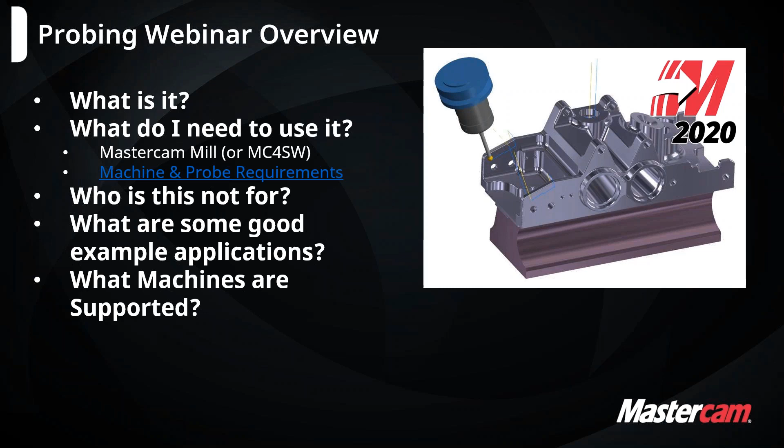because there's the software side of the actual Productivity Plus add-on in Mastercam, and then there's implementation on the post as well as on-site to get everything working flawlessly for you. So what are some of the benefits?

And I've touched on this already a bit, but wanting to use the probe for more than just work offsets, or maybe the routines to do in-process inspection on the machine might be a little cumbersome, or you just want to make sure that all the probe routines are set up before that program hits the shop floor, so you're not reliant on someone else to make sure a certain probing routine happens throughout the process.

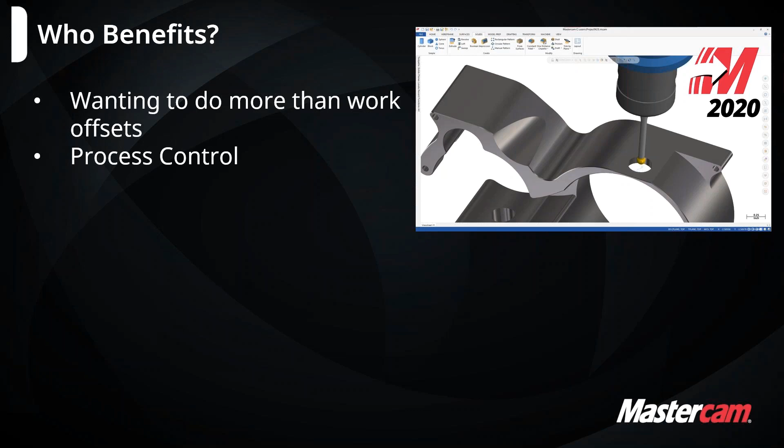So that goes into this process control point, in that all the probing routines are self-contained in the NC file. So when you see a posted program from a Productivity Plus added program in Mastercam, you're going to see all that if and then logic within the NC code. So it's self-contained and travels along from job to job.

And that also gets into predictive process and the smart machining, I think, tie into each other in that you're getting an in-process state of the machine components throughout the job. So you're essentially adding intelligence to the program to get the most out of it, and cut down on cycle times and all the benefits that go along with that.

And the reliability point too just ties into kind of bringing all of those points together, in that you're, as I've already mentioned, reducing the amount of human involvement and potential issues in communication throughout the shop floor.

And then another benefit is the efficiency aspect of this that I've touched on here, which, if your work offsets and tooling offsets and everything is all dialed in, you're going to maybe cut down on the amount of air cutting you're doing, especially if you're working with a casting or a forging.

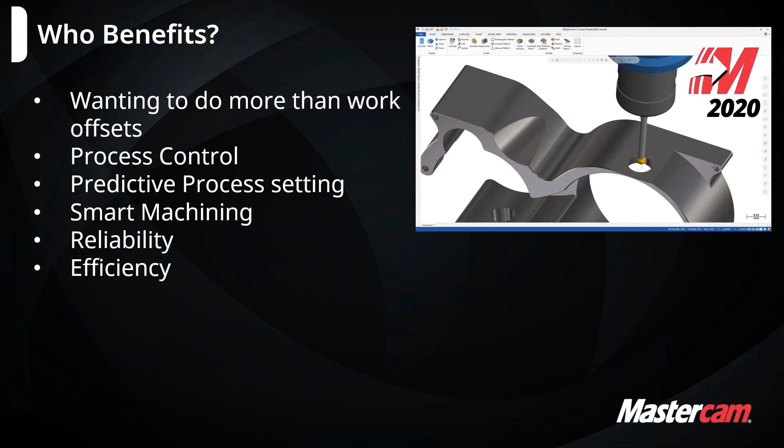If you have that coordinate specifically dialed in for that specific casting, those first couple passes, even if it's a big part, that can be a lot of time if it's just wasting time cutting air because your height offset isn't exactly correct. What are some of the challenges to the Productivity Plus software?

Let's say you don't have a Renishaw probe, like a couple people answered. There are other options for you, and we've done a lot with customizing post processors for specific customers. There's also other workflows that you can do to still add some of this probe technology into the part, even if you don't have the Productivity Plus. But as you guys will see in a minute here, when Joe goes through it, you'll see some of the power that the actual software has.

And then the other challenge, I did these in reverse order, but just getting everything set up, depending on the specific machine tool and what version of the Renishaw software you have, there's a lot of variables to dial in and make sure that everything functions flawlessly for you.

So that's why when we quote this out for a specific customer, you'll typically see 3 line items on the quote. One's going to be the actual software add-on to your current Mastercam package. 2 is going to be the post-processor modifications. There's a handful of different files that need to get set up so that it talks with the Renishaw software that's on the controller. And then the third part is a training implementation portion of it.

So we always come on site, and it's essentially a requirement of getting this package, because we're making sure that post modifications that we've made interface with the controller properly, that the open variables for the probe routines are set up correctly, and then lastly, just training on how to actually use the interface.

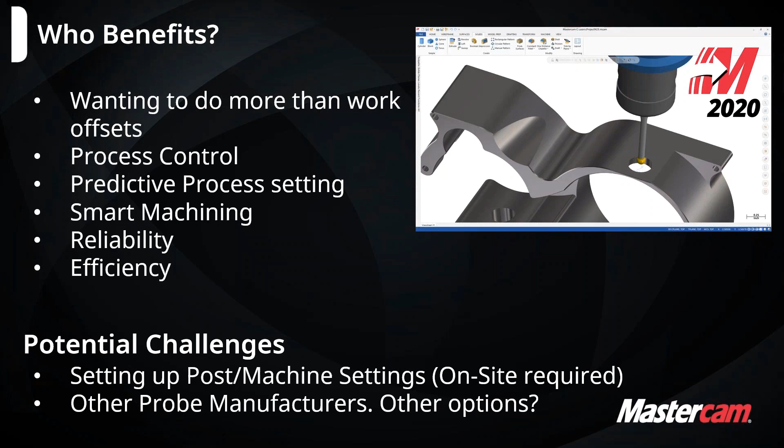So, like anything we sell here at ShopWare, we want to make sure you're effective with the tools that we're providing. So with that being said, we're going to take a second here to pass it over to Joe. I was wanting to bring up a couple updates to Mastercam 2020 and Productivity Plus.

So with 2020 being released here, an update to Productivity Plus is that we can actually post out probing cycles with our default MPFAN post. This should be used with caution, obviously, for any toolpath that you might be running. It might not run on your machine per se, but it is good to see the code output in the meantime before ShopWare can get out there and prove out your machine. So that's what we're going to be using today for quite a few of our examples.

Another update that we have for 2020 as well is that probing used to require wireframe, but now in 2020 it supports probing off of solid edges and other model features. So those are the two main ones here.

Another thing I wanted to mention as we're going through the examples is the help menu that's in the bottom of the toolpath manager for each of the probing toolpaths. It's extremely helpful and very informative for everything that the dialog boxes might display. So it's very good for practicing and familiarizing yourself with some of the jargon and language inside of those paths.

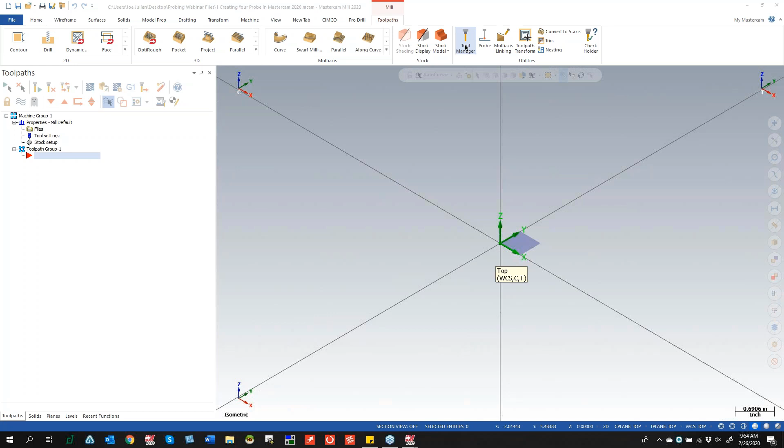So whenever we pull up a probing path in Mastercam, it's going to ask us to define a probe. So under our utilities subsection in our toolpaths tab in Mastercam, once we hit our probe, it's going to display our prompt. And we can choose to edit the sample probe that comes with Productivity Plus, or we can completely create a new one.

If we have a specific probe database that we want to update into our new software, if you're a new user coming from another user that might have a little more experience, we can import that as well. So I'm going to demonstrate creating a brand new sample probe. If we go in here, we get this edit probe dialog. We can give our probe a name, so we can say, Prod plus example.

Now, depending on how your machine runs the offsets, we're going to give our tool the tool change ID, and depending on what your machine takes, we'll either match that or give it a different offset. In our probe module, we have a drop-down list with a few of the Renishaw supported probes inside of Productivity Plus. As we select one of these, we can see that the window to the left changed with our selection. So I'm going to select an OMP40.

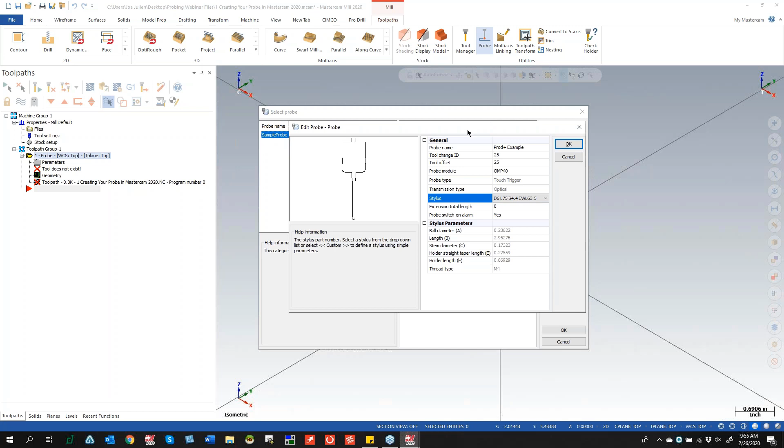And then for our stylus, we can select that as well. I'll choose a 75 millimeter. And then we should be good to go. The way that this works is that anytime we update or create a new tool, it writes that data to a library, kind of like a tool database library inside of Mastercam. But obviously it's going to fall in a different spot in Mastercam, in the general directory.

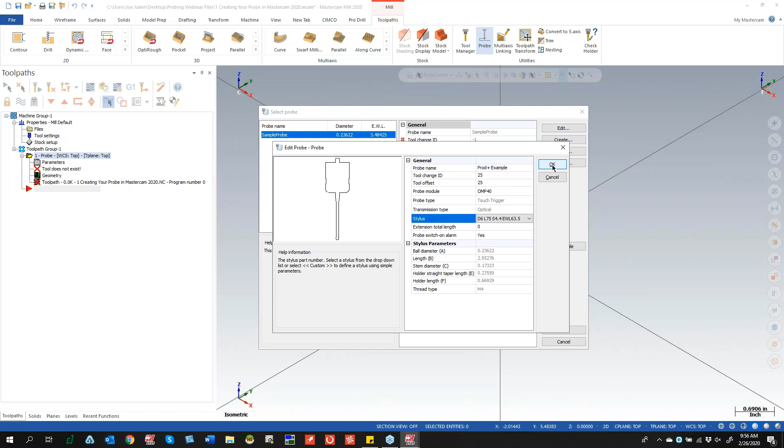So if we say OK to that, we can see our Productivity Plus probe installed into our list here. We can go ahead and say OK. It'll say the database has been modified, and then we can say yes, save the changes.

So after we select our probe and we define it and everything like that here, we're going to get our dialog here. So just going through some of these options here, these are going to be your kind of generic probing routines. So we've got point, measure a line, measure circle, measure a plane, a 2D corner, a 3D corner, and web pocket here.

As we go along through the examples, we're going to be displaying the functionality of some of these as well. And these over in this area here are going to be what you do with the cycles and the data that we get from our generic probing routines. So we can construct a point from two separate lines, or maybe a midpoint of a line. Between something like two circles, we can construct a line and then measure that and report that data back, and construct a circle as well. I believe this is going to be our constructed plane.

So these are very powerful in terms of, we can store these data points here. We can store all that in our machine directly, and then be able to call those variables back up as we post out our code.

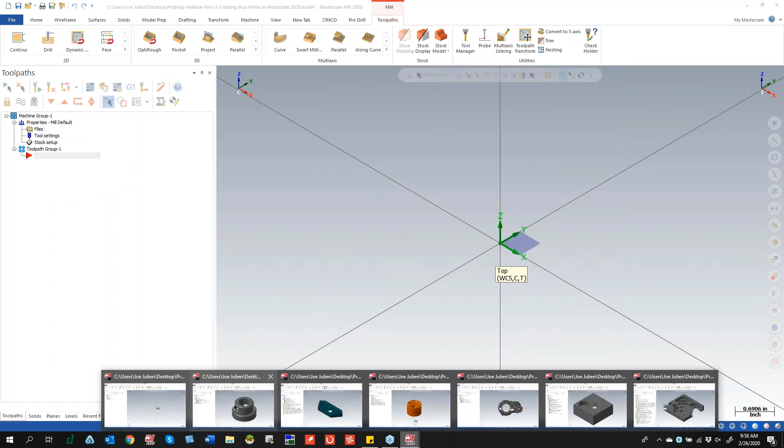The first example that we're going to be going over is going to be our calibration. So I'm going to go ahead and back out of this, and then we'll go into an example. So typically, the times that we want to calibrate our probe is when we get a new stylus, when the probe system is first installed on the machine, or if you suspect a crash happened or something happened to the stylus.

So we're going to go over that in Mastercam and show you how that cycle is going to work. So I have a probing routine all pulled up here, and I'll go over creating it from scratch. But we can see that the probe displayed is going to be our probe 25 that we selected. Zooming out a little bit, we're actually going to get a depiction of our probe inside of Mastercam itself. You can maybe see inside of the tool list, or the operations list, that we're actually defining it as a lollipop mill. But that's just how Mastercam's handling the geometry of the probe in the background.

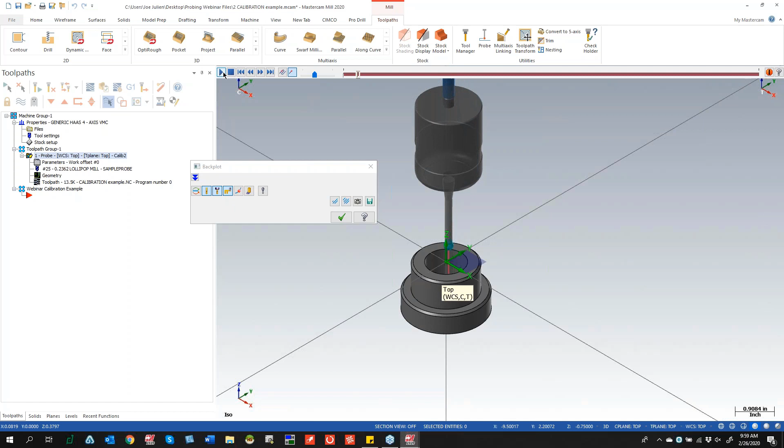So as we go around here, I'm just backplotting the cycle out. I'll go ahead and speed this up a bit. So if we look inside here just a bit, we can see our probe doing our calibration. It's going to get clock surfaces and then touch off in Z as well.

So building this from scratch, we can actually create this new path here. I'm going to go ahead and pull up a probing example, and then, as we said before, we're going to be selecting our probe calibration. Like I said before, we're going to want to take note of the help information in the bottom of our window. As we go through all of this, it's going to give us examples and explanations of the things that we have here, along with the visual representation of that. So it's definitely going to be helpful for people that are just starting out.

So in terms of our clocked versus our probed cycle, we're going to be wanting to do a probed cycle here. As we see in our help menu, when we choose clocked, we must know the exact XY position. When we're in our probed artifact location, we're going to be able to jog down to this generic position of where we're going to be probing, and do it that way. So that's what we're going to do. We're going to choose probed. So we're going to be selecting a ring gauge and a reference surface. That's going to be our Z value here.

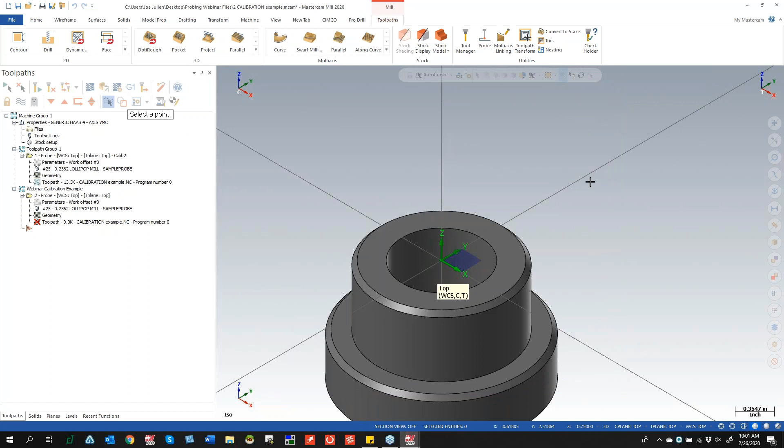So in the center of the diagram here, we have our 3 dots to the side. If we hit those dots, it's going to pull us into our Mastercam window. So on top of that, we can go ahead and select our center, and then we can give our artifact a diameter. I know this is a 1-inch true diameter for our artifact, and then we're probing the inside of that versus our outside.

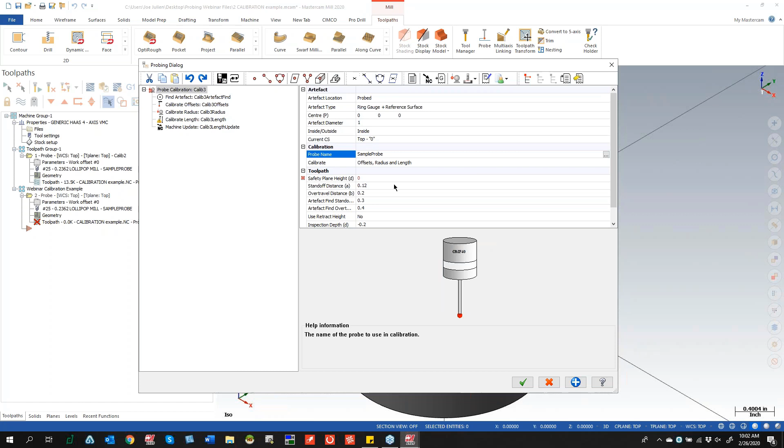So I'm going to go ahead and give this a safety plane height. You're going to want to always do this when we're doing any of this in Mastercam here. So I'm just going to give it a quick 500 thousandths. And then in terms of all this, it should be all set out of the box. So just kind of explaining what these are really.

Our standoff distance, as you can see here, is going to be the distance between our nominal surface and where that measurement's going to end. Over travel here is going to be how much more the probe can go once it hits that surface. So when you're jogging down, that's kind of helpful here, because it'll actually go until it hits here.

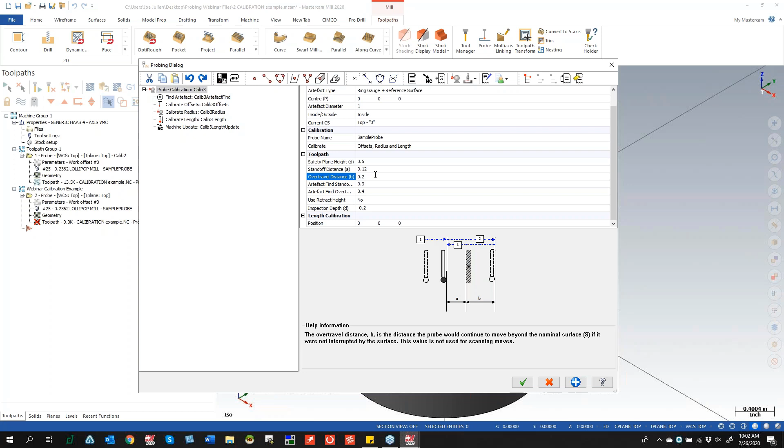So just resizing this a little bit. So we've got a couple of these that you can kind of take a look at here. We can use retract heights as we're going to different points. That won't be necessary for this particular example. And then probably the most important one here is going to be our inspection depth.

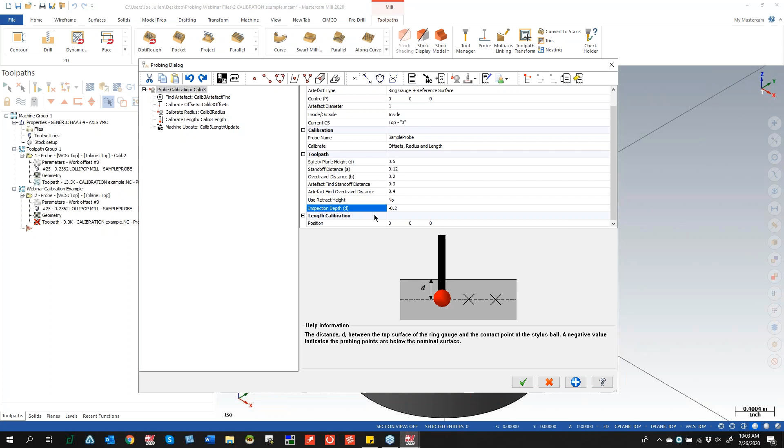So this is going to be where we're actually off of the point that we selected inside of Mastercam. So we chose the origin at 0, 0, 0. It's going to go minus 200 thousandths into that bore there, and then go ahead and perform the calibration. So again, with our length calibration, we're going to want to select a point here. We get our 3 dots. We can go inside of Mastercam and select a point.

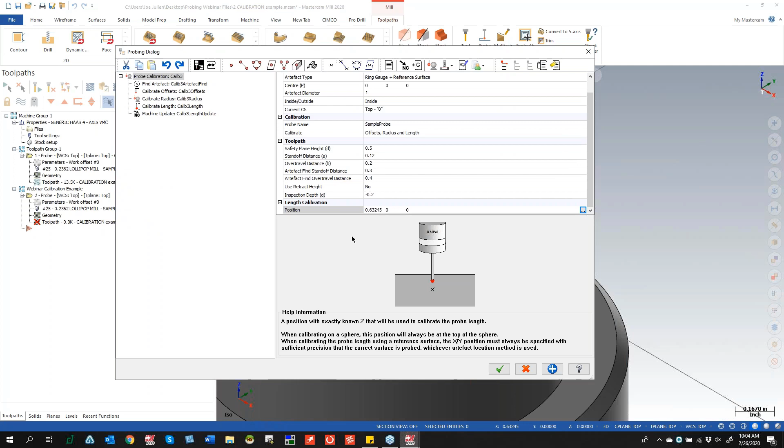So what I'm going to do is I'm going to use the quadrant here, and I'm going to use my shift click, and that's going to give me a reference point here. So I can go ahead and pull this out, or even a little bit further in between here, just so we're actually going to be able to touch the top of that bore, or the artifact there. So I'll go ahead and select enter, and then we've got ourselves an X dimension there, and I'll go ahead and say OK.

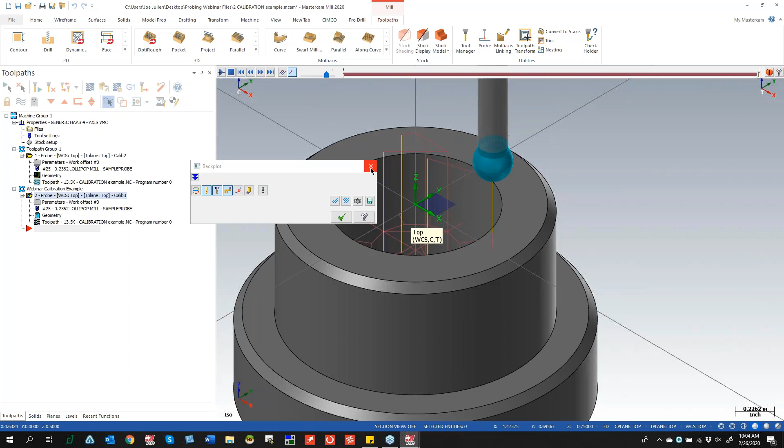So we kind of went over it before in the beginning here, but we can go ahead and backplot this out just for good measure. So just going through here, fairly simple. Just getting our probe calibrated before we even start with our cycles here. So if no one has any other questions on this, I'm going to actually go into my second, or I guess third at this point, example here.

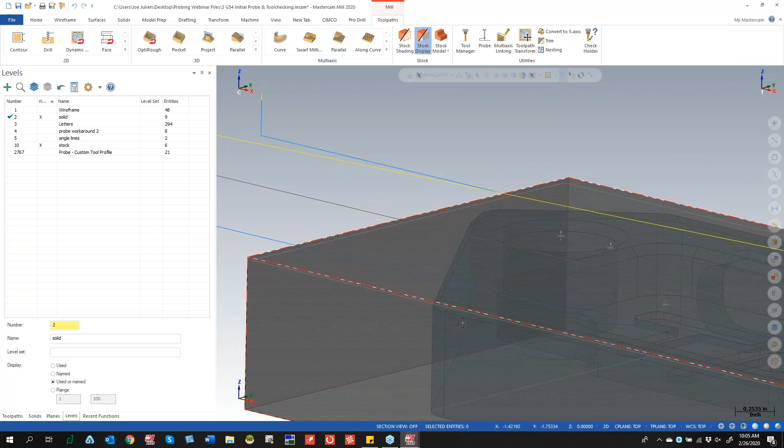So this next one here is going to be an example of actually updating your G54 offsets and things like that, and actually tool setting, and then broken tool length reporting and things like that. So as we can see here, I'm going to actually display my stock for a second. So we've got our stock here, and then, let's see if I can turn my visibility on, this is going to be a boundary representing the face of the actual part here. So I'm going to go ahead and get back into view here.

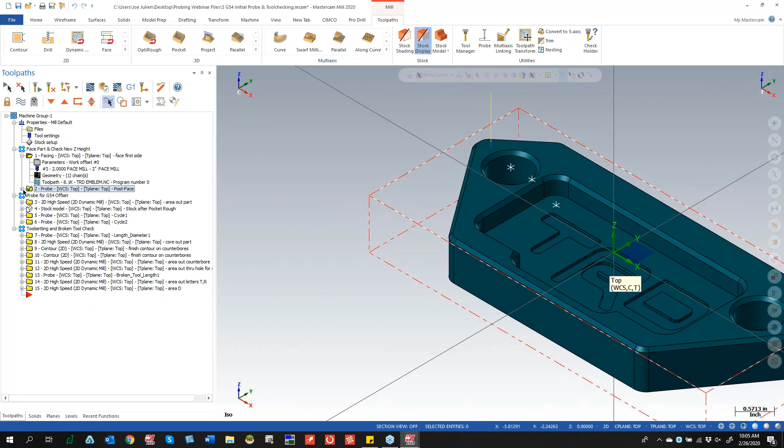So the first operation that I have in here is going to be a facing op. So it's going to be getting it down to our profile of that white boundary there. And then what we can do is actually update that Z level after we did that facing operation. So going back into our probing cycle here, this is just going to be the first one of our options here. It's going to be our probing just a measured point.

So right when we pull up an inspection cycle here, no matter what we have in here, we're always going to get this inspection cycle. We're going to want to specify our safety plane before we go, and then some of our standoff and over travel distances that we kind of went over before in that previous example.

So as we pull up our measured point here, we're going to be able to select a point here. So I can select this here, and then we have an approach point for this cycle as well. So this is just coming in straight from Z. If we want to avoid a fixture or something like that, we can alter that as need be here.

So we have stock allowance. Let's say, like Matt was saying, if you're using a casting or something like that here, or if we actually are just measuring the stock and we want to go off of the model, we can use a stock allowance and then edit that value inside of here. For this particular example, we'll just leave that at no.

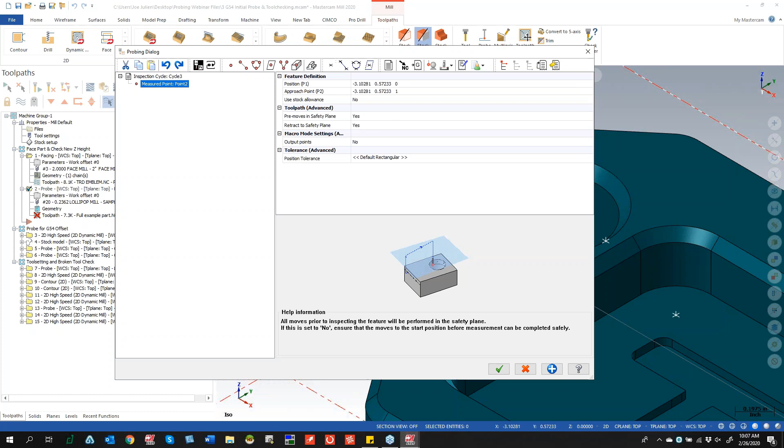And then we have pre-moves in our safety plane that we specify here. It's going to be just 1 inch absolute. And then the retract after our point's done, it's going to come right back up to that safety plane. So I can say OK here, and then fairly simple path here. We're just touching right back off here.

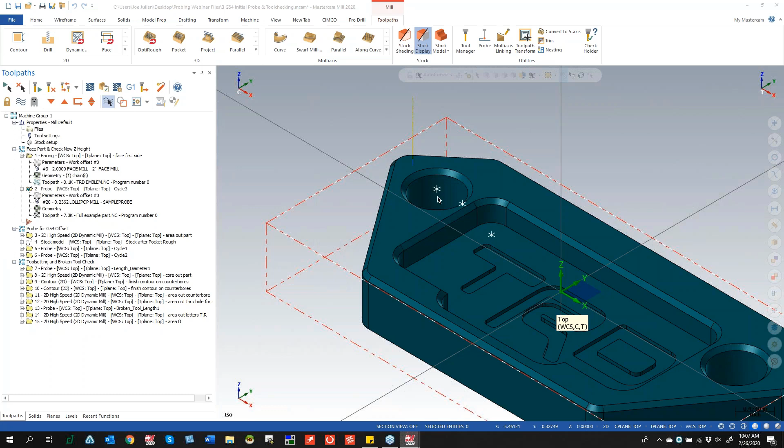So I did want to show what this code looks like as we're coming out of Mastercam here. So let me go ahead and just hit G1 on my probe cycle here. I'm just going to post this out here. We'll just say, for example. So whenever we post out a probing path here, we're going to get this dialog that shows up. So we have the Renishaw machine file, which is going to be for the default posts.

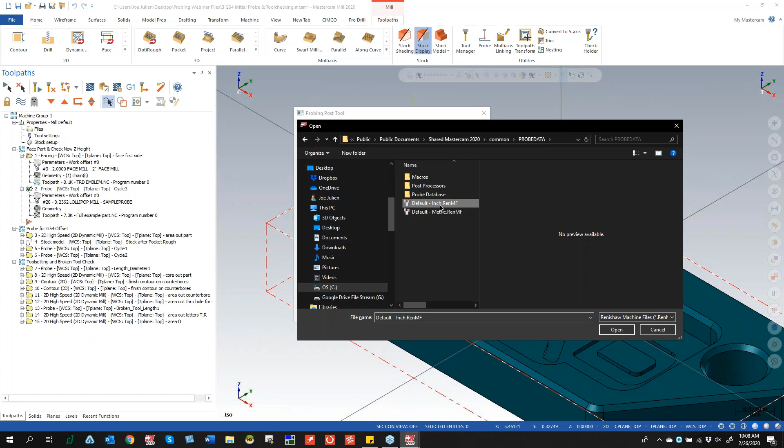It's actually located if we go into probe data here, and then we have our default RenMFs here, and that just matches back up with our MPFAN post. So I'm going to go ahead and select my default inch RenMF. A RenMF is a Renishaw machine configuration file. It's essentially a post processor that defines all the variables, all the parameters that we need to write to when we are posting out machine code, probing code to our CNCs.

And then we have another directory here where we can specify where our NC file goes. If everything looks good there, we can go ahead and process our code. So at the end of any successful G1 cycle here, we can see it succeeded at the end of this here. If we have any errors possibly, they'll show up in our dialog here as well.

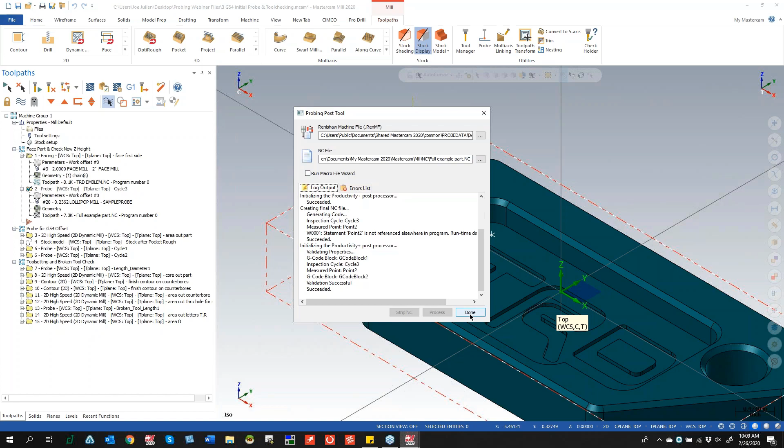So upon hitting done, my default editor is going to show up here, and then we can actually see how long this code is that comes out here. What that's doing is it's outputting all of the macros that are associated with this here, and then if the actual code is meant to call those up, then we're actually going to be going into those subroutines here. So we can kind of see what that code looks like a little bit here as we go. And that's just for a point cycle here.

So the machine code does get a bit hefty. We just wanted to make sure that the customer knows that this is what they're dealing with here. It really makes it a lot more flexible because you have all the information available to you, no matter how much we're posting out here. So I'm going to go ahead and close this out here, and we can go into another one of our examples.

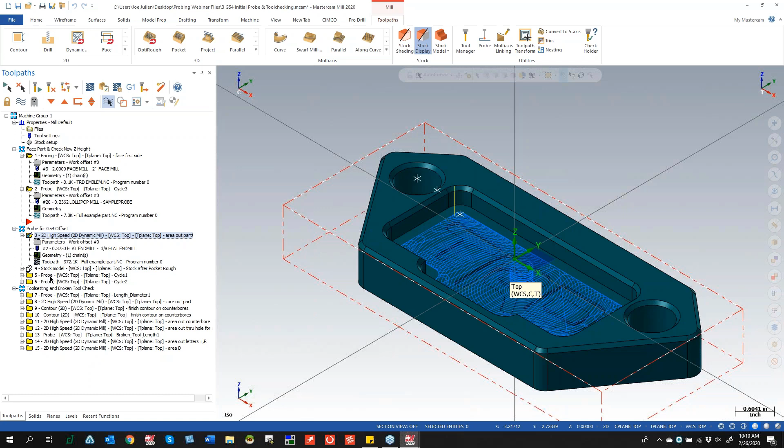So inside of here, I've got this area kind of just dynamic milled out, and then I created a stock model just to display what we're showing here. I believe we're going zero stock on the floors and then 150 on the walls. So after we do that cycle here, we're going to go into our probing dialog. So what this probing cycle is doing is it's measuring that point on the floor of our cycle here. So we have an approach point just like we saw in the previous example here.

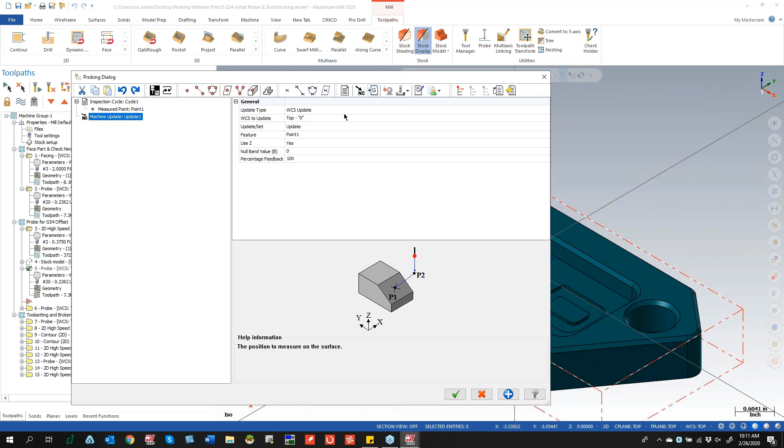And then the other thing that we see in this particular probing toolpath here is we see a machine update. So that's the first time that we've seen that here. It's going to be this icon on this side here. So whenever we pull up a machine update function inside of one of the probing paths, we're going to be prompted to choose an update type. So this one is going to be a WCS update. We can update tool length, tool diameter, machine variables, and then a rotation as well.

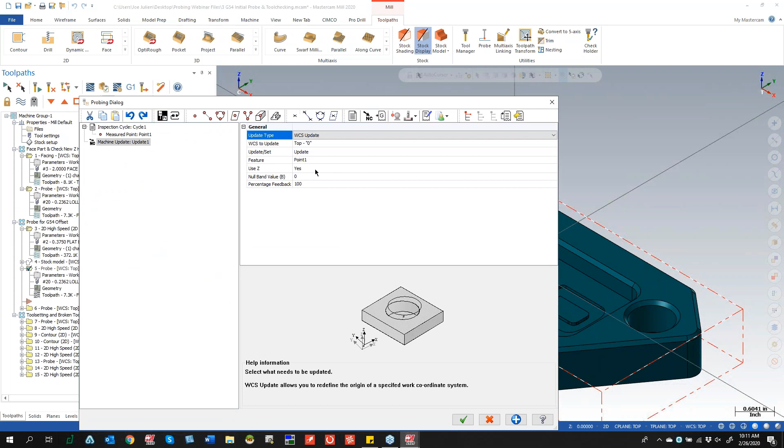So this point, it's smart enough to know that this point is only going to be updating Z. If we were doing something like a corner or something like that, then it would prompt us to update X and Y as well here. So we'll go ahead and we'll cover some of these other variables a little bit later, but we'll just say OK. And then we'll check out our second path here, which is going to be updating X and Y.

So going back into here, we have another machine update, but instead of just a point, we're actually measuring a web pocket, which is going to be our icon right here. So I'll actually pull up a blank one just to show you guys how to start this from scratch here, because it's a little bit more involved than just a point here. So I'll go into my probing dialog. I'll go pull up a measured web pocket.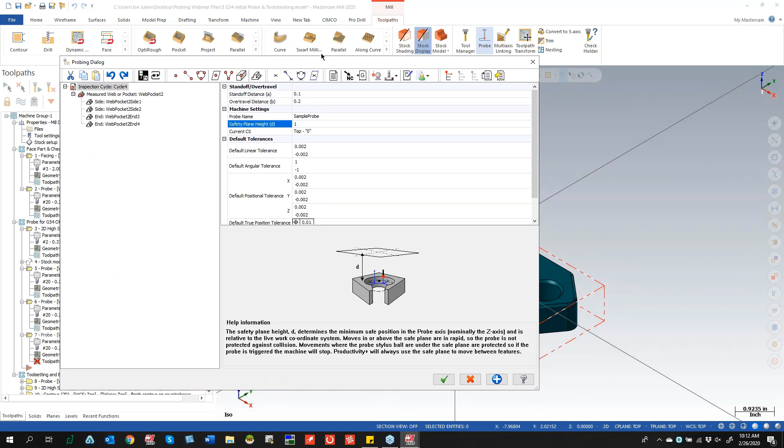So inside of my safety plane here, looks like we are at Z0 for the top face of our part. So that safety plane of 1 should be okay. And then we can go ahead and go into our points that we're selecting for our toolpath here.

So what we can do is go into our selection window here. And then this box is defining the stock that we're using for our machine. Let me go ahead and use this. So I'll use the actual solid model to program this instead of our wireframe. So I'll go ahead and select this point here. So using the temporary midpoint, I'm going to be able to get the center of that line.

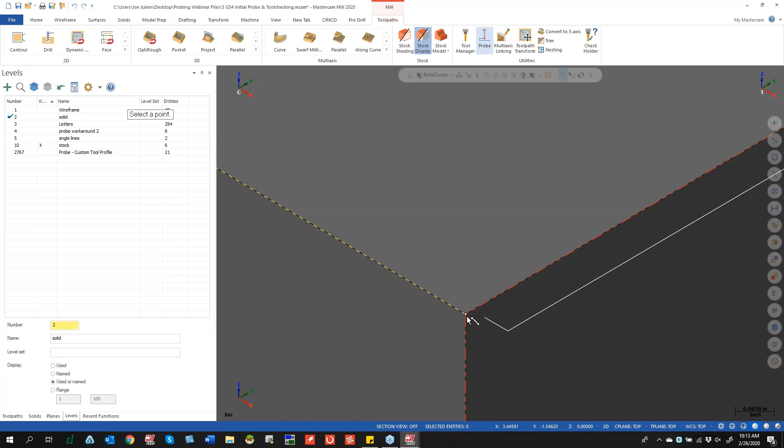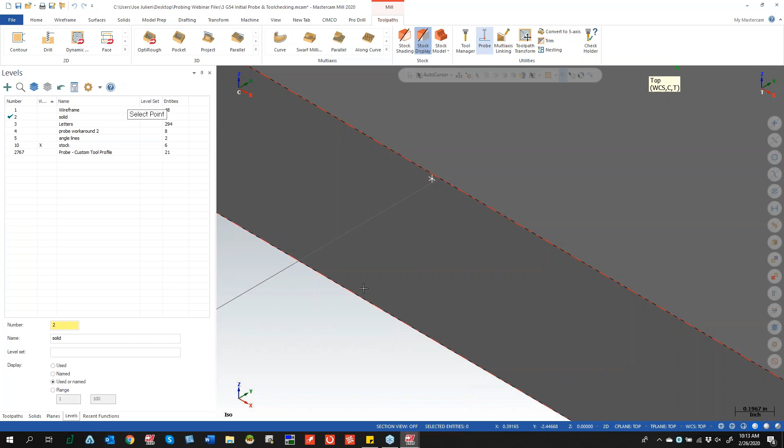And then I'll go into my second box here, and that point needs to match up exactly across our value here. So we can go ahead and temporary midpoint this, highlight, and then we've got our point here as well. So for our width, that's going to be the opposite dimension that we're selecting here. So we can go ahead and zoom out a bit into our 3 dots. And then on our model, we have our midpoint and our midpoint there.

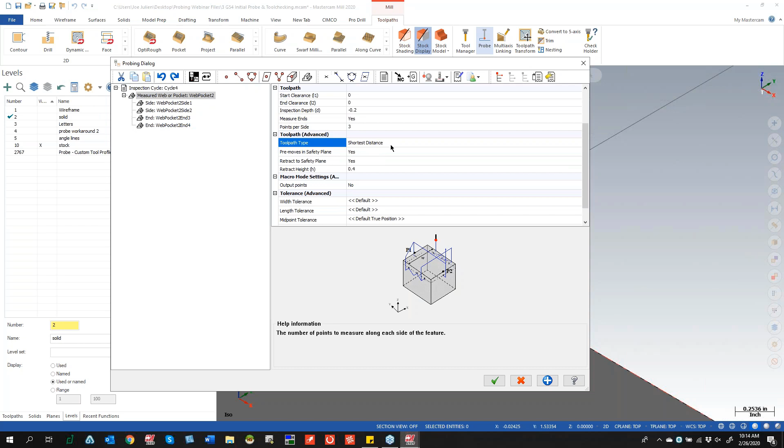So we have an inside-outside as well here. Toolpath clearance is just going to be able to specify where we want our points to land up on here. Our inspection depth, we'll keep that at 200 thousandths. And then measure ends is going to be the actual corners of the toolpath there. So the points per side, we'll see that once we output our path. And then shortest distance compared to linear. We'll go over both of those here. So we'll start off with linear, and then we'll show you shortest distance.

So now doing this here, if I calculate out my path here, it's going to be hitting on 3 sides of my length here, hitting on 3 sides of my width, and then measuring the other sides here. So then we're getting a specific X and Y dimension for our path here. So that's with our linear option selected here.

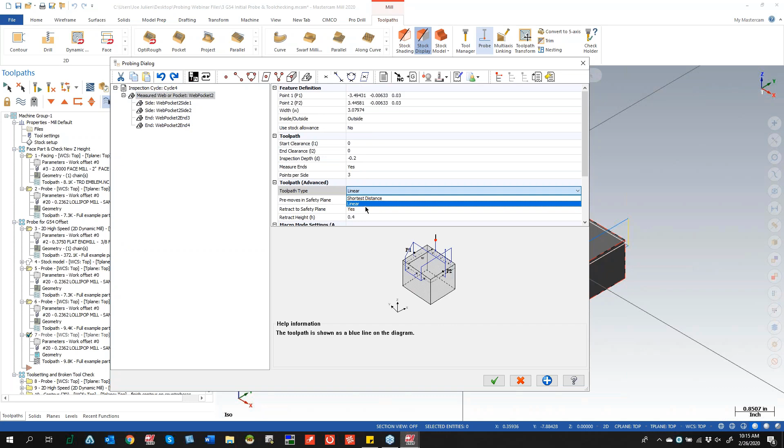What we can actually select here as well is we can go into here and then change this to shortest distance and then regenerate our path. And then we can see that it makes these shorter moves here. So that's going to be a little bit more geared towards more complex geometries. But for this, it's just a good example showing you what that is here. So that outputs that.

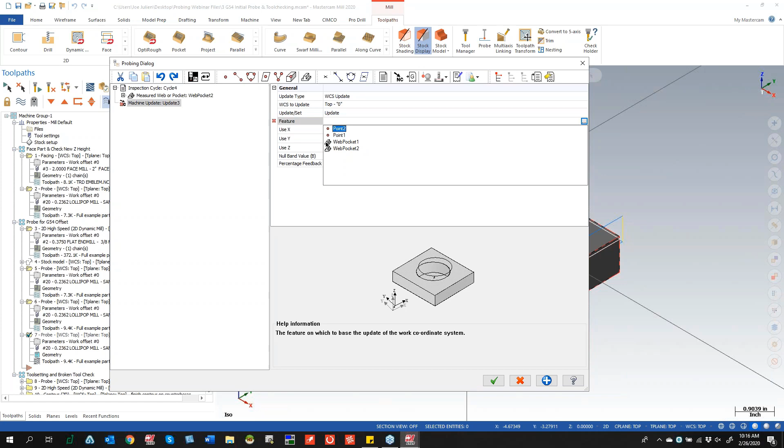So in terms of the machine update that we select here as well, we can say NC update, and then we have a WCS update. So we can choose to use X or Y, and then we can say no to Z since we already updated that with our previous probing cycle there. And then we can select the feature that we're trying to grab the values from. So it's going to bring up this dialog with all the other probing cycles that we have in our file here. This is going to be our web pocket 2.

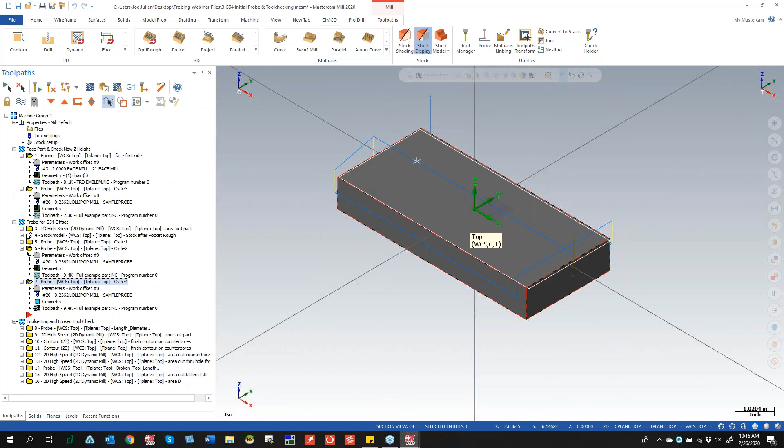We say OK. And then depending on what variables we spit out to the machine that we're specifying in the RENMF, those values are going to be updated to the machine directly. So just regenerating that. So that's a little bit of an example of a couple paths inside of probing, and then some of the NC update functions as well here.

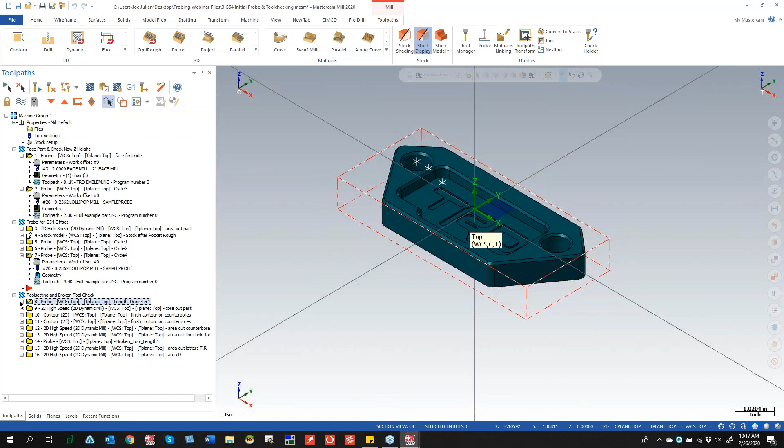So moving on to our next path here, I'm going to take off my stock so we can just show our model. So if I expand the first path that I have inside of here, our probing cycle is going to be tool setting. So if you do have a Renishaw tool setter installed on your machine, we can actually program those things out. And those can be used for checking tools, if we give it tolerances, things like that. And that's going to be involved in a lot of our broken tool length calculation here.

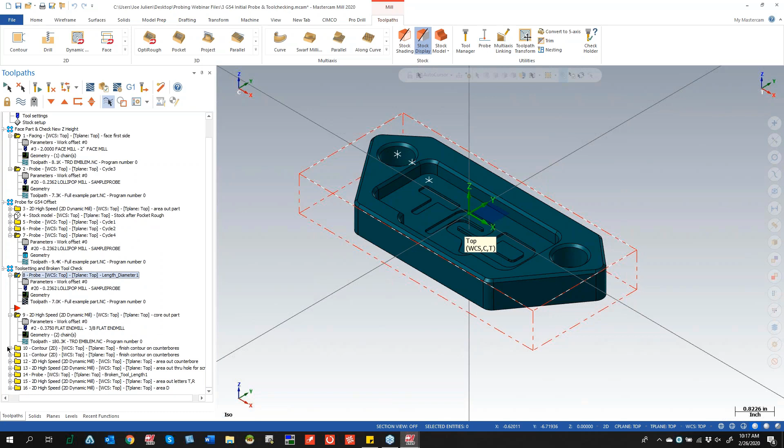So before we go back to this, we can specify a tool ID. So if we see in our file here, we have tool number 2 doing a lot of our dynamic milling and toolpathing. So if we have a lot of heavy work on one tool, we can go back to these specific areas and then check if that tool got chipped, if the tool offset needs to be updated, things like that. So as we go here, we see we're doing quite a bit with this tool 2. So I'm going to go ahead and close these out.

So after we do a lot of that work here, we can go ahead and check to see if our tool got broken in the process. Inside of our parameters, we can go to tool setting and give it a tool change ID of what we want to choose. The measurement type is a broken tool length. We can give it an offset number if need be as well. And then we set a tolerance for how much that value needs to be within to consider it a broken tool or not.

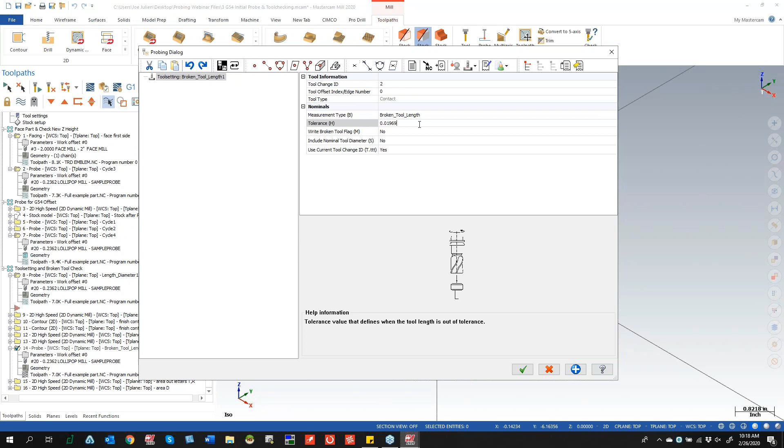So kind of like Matt was saying, it would be very good for lights out manufacturing, things like that, just to be able to check if that tool does break in the middle of a cycle, and then we can go ahead and stop our path. All right. So I'm going to go ahead and close up this example, and then we'll go into our 5th example.

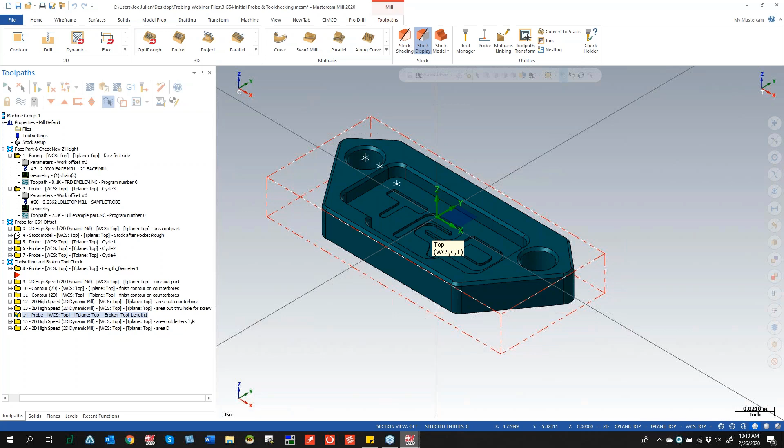All right. So we're going to head into another one of our examples. It's going to display a bit of the other functions side of Productivity Plus. Just like in our previous example, I have a level with my stock defined. So I'm going to go ahead and get into our probing cycle. This is going to be displaying measuring a 3D corner.

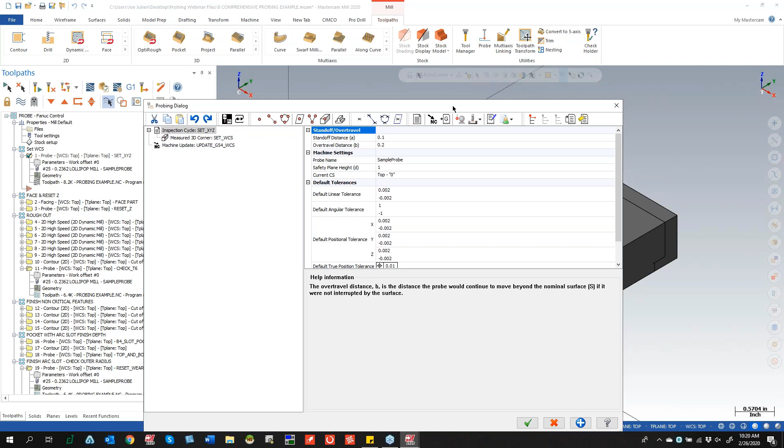So before we start off, like we said, for just picking up tool offsets and things like that, Productivity Plus is not going to be geared towards just the simple kind of functions. We want to focus on the more advanced things, rotation updates, things like that. But this example is to show you that we can actually pick up a work offset as well. So in this inspection cycle, we're measuring a 3D corner, and the point that we choose is going to be our XYZ0.

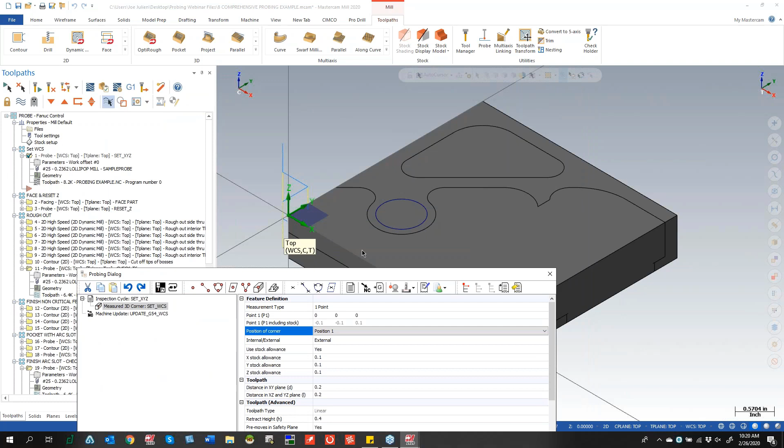And then we can choose to use stock, things like that. In terms of our position, this matters with how we define going into the part. So if we select position 2 instead of position 1, we see that the motion is completely different. Now we're going to be violating that part. The position change will change inside of our help menu as well to display that. So P2 would be the right side corner, and P1 is what we need here on this side.

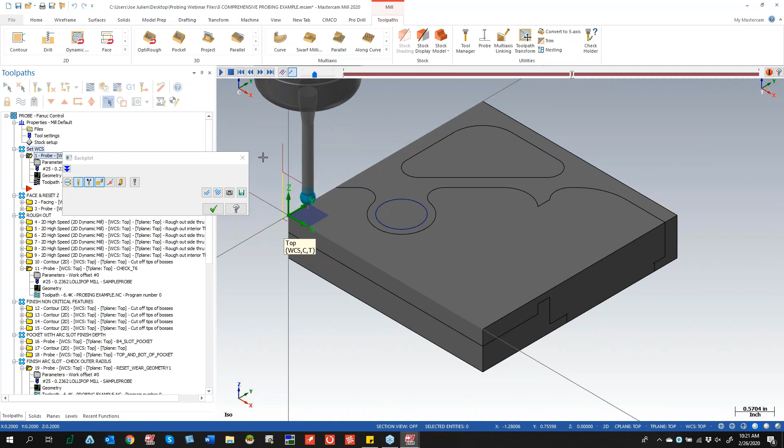So going through that, we have touching off in X, touching off in Z, and then touching off in Y. And like we said before, we're updating our machine update. So we have a WCS update setting from a feature, and the feature is going to be set WCS, which is our measured 3D corner.

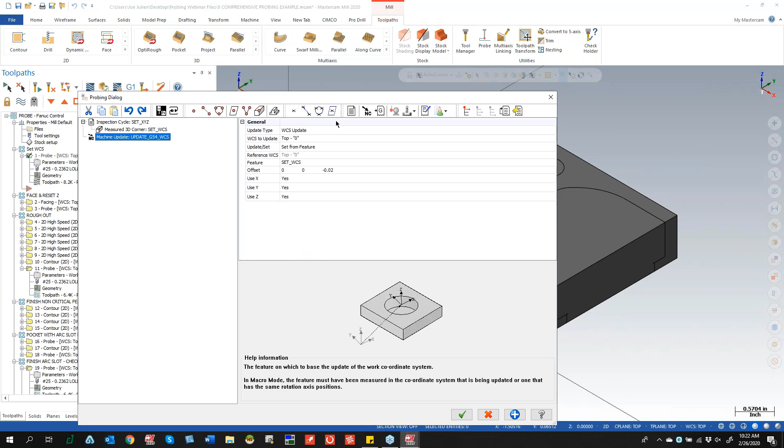Okay, so going through another example. We can reset the Z after facing. We already went over that, so we don't have to go through this one; it's exactly the same example as before. So let's go ahead and check that tool. We do a lot of dynamic on this one as well. And now we're tool setting, checking tool 6, and giving that a tolerance as well, I believe of 115 thousandths.

Okay. So getting into a little bit of the more advanced features. In operation 19, we can actually choose to reset wear geometry for our tools directly through Productivity Plus. Depending on where we store those values, we can write the actual values that we need for those tools. So for 2606, we're setting it to 10 thousandths, and 2406 as well, we can set that to 0. Likewise here.

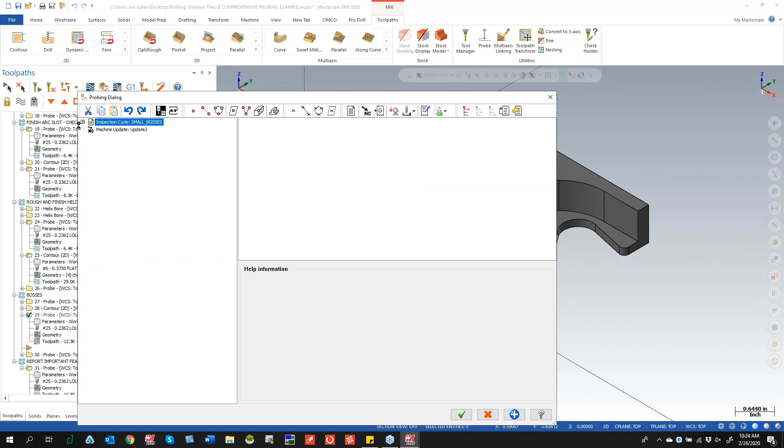As we were saying before, we have the opportunity to construct different geometry with probing. So we're measuring the circles of our bosses on the face of the part. We're measuring all 4 of them, and then we're constructing a point or a circle with all the references for those circles. So I'm going to display this directly. I'll pull up a probing operation so we can probe the circles of these, and let's go ahead and select them.

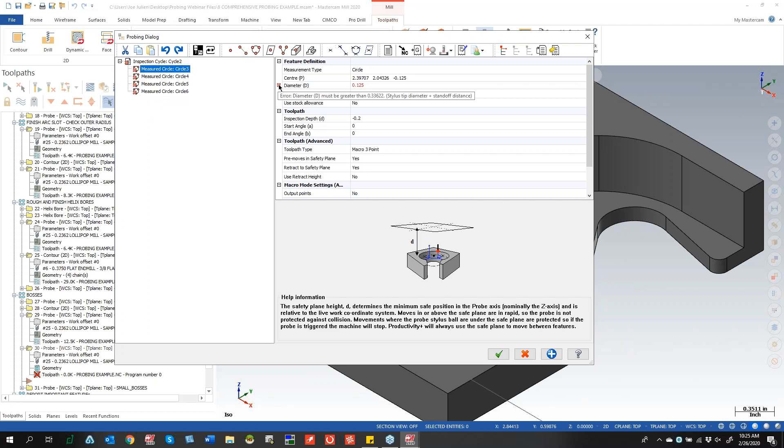Then we just hit enter as we're doing that here. So let's go ahead and give it. So we have kind of a smarter dialogue here in terms of, if we do get any error messages and things like that, it'll actually show us what we have to do here in terms of changing those values to get it back here.

So let me go ahead. We'll pull up a previous cycle. So depending on what stylus we have, it's going to matter with what our probing cycle outputs there. So going back into here, we can construct a circle. And in terms of the values that we need to get that constructed circle, it needs to be in the same probing dialog. So we're not able to grab any of the positions here. I just wanted to display a little bit of how that's going to be working there.

So in terms of constructing that circle here, to reference any centers of these guys here, all we're going to need to do is, if it's in the same dialog here in our constructed circle option, drag that down here. So right now we don't have 3. We can reference that inside of there, and then we can have a position reference to our center.

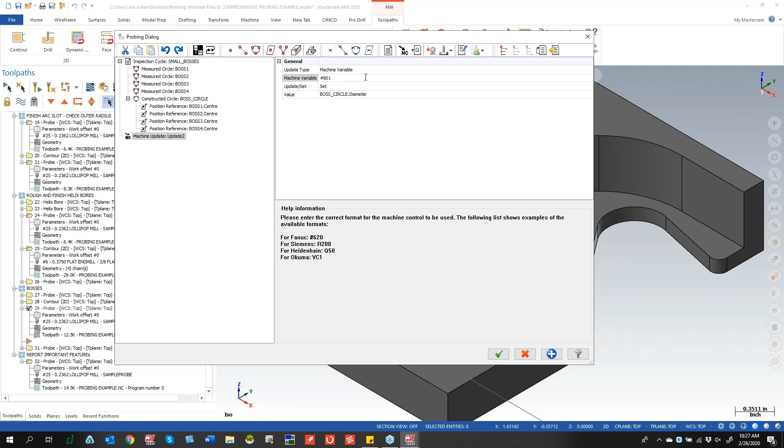And then we can update that circle diameter to a machine variable with our NC update function. And then we can set that to whatever we'd like here inside of our machine. And then the value that we select is going to be our boss_circle_diameter there. So if that's making sense, we can go ahead and move on here. We'll come back to the reporting features a little bit later once we get done with this here.

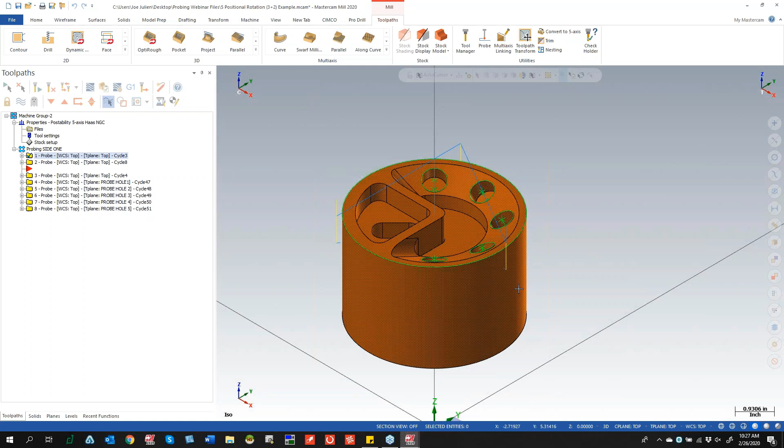So our next example is going to be a 3+2 example with probing. So as we can see right now, we're just getting the diameter of our circle here. We can NC update that to a machine variable, just depending on what we want to do here. Right now, we're just measuring off that circle on the top of the part here. No big deal there. Kind of went over that.

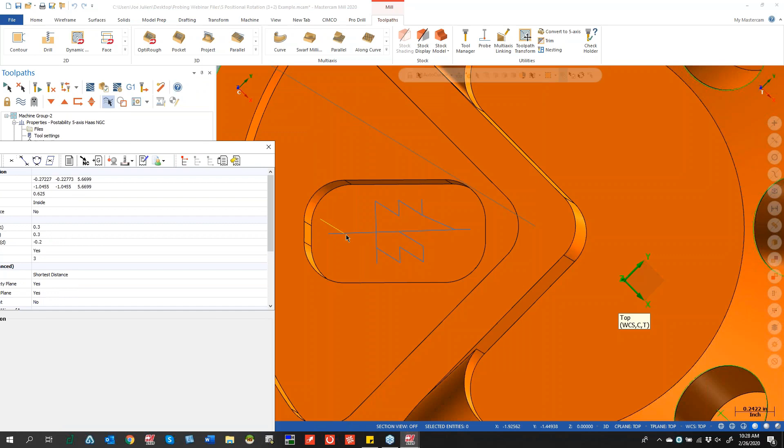So next is going to be probing the inside of this slot here. That's going to be another one of our web/pocket routines. And it's going to work the same way here. We're going to want to select a point on each side of here, and then a point on the tops to get our width. And then obviously we're working on a slot here, so we're going to go on the inside. And then we set a safety plane.

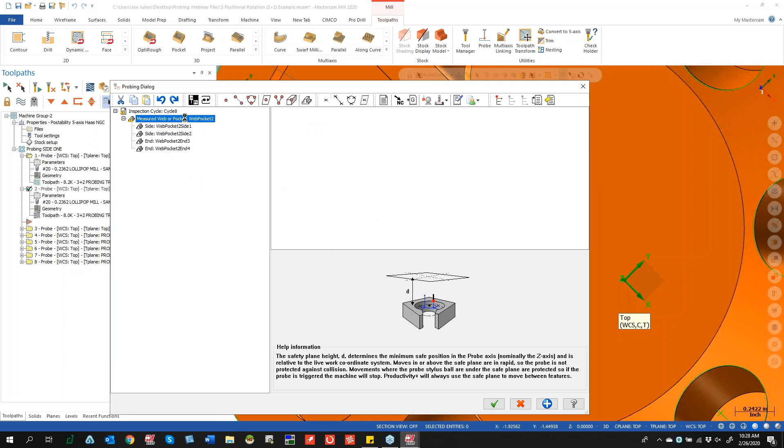So since this part is up higher in Mastercam, kind of where it would be fixtured at, we set a safety plane a bit higher than the points that we're seeing here. If we were to make this a smaller value, then we get a warning message in our dialog here, and hovering over those, the safety plane is below where we're actually probing, so it'll tell you that. So let me back out here. So in terms of that, fairly simple here. We're just doing 3 points, shortest distance, and then grabbing the 2 endpoints there as well.

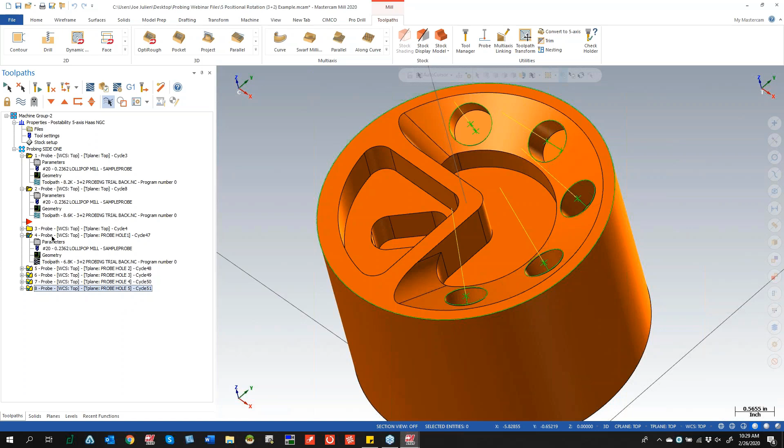So now, getting into a little bit more of the positional work, 3+2 work here. Like any 3+2 work in Mastercam, we want to set our T-plane to something different than our top plane to make the machine make that rotation. I used the hole axis function inside of Mastercam to get this geometry here, and I was able to create those planes directly off of that geometry that was created.

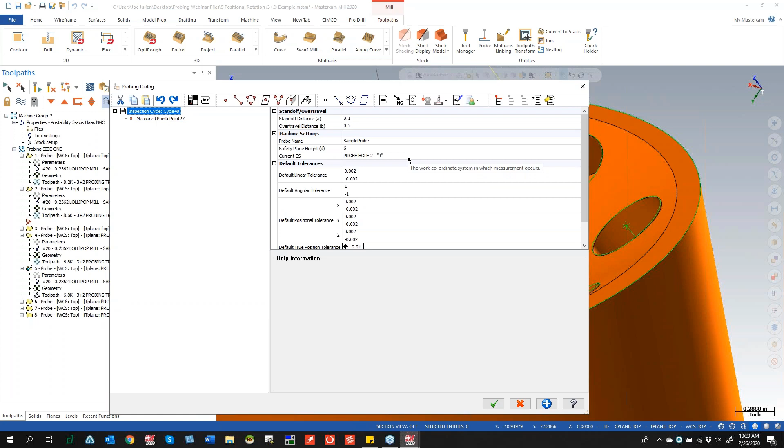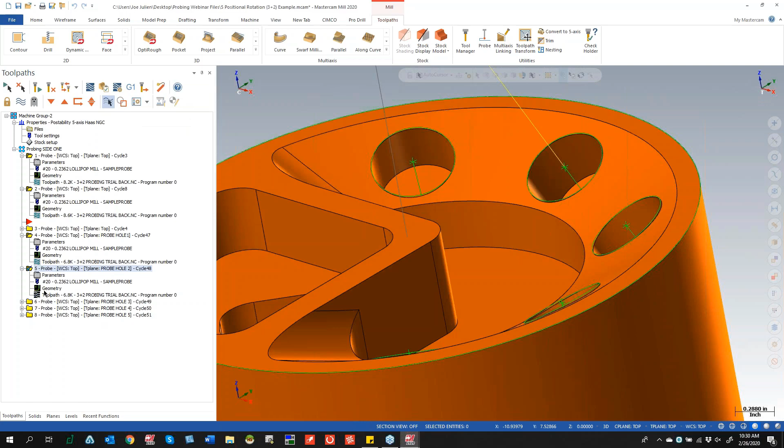So going into our probing cycles here, we're going to be going into our parameters here, and under our inspection cycle, we have our probe name, safety height, and then the current CS. Previously, all we've been dealing with is top. But if we go into our 3 dots here, we can go ahead and select it from our planes manager. So outside of that, we can go and select kind of the same way that we have been with our points here. And then we can actually see how this outputs in backplot.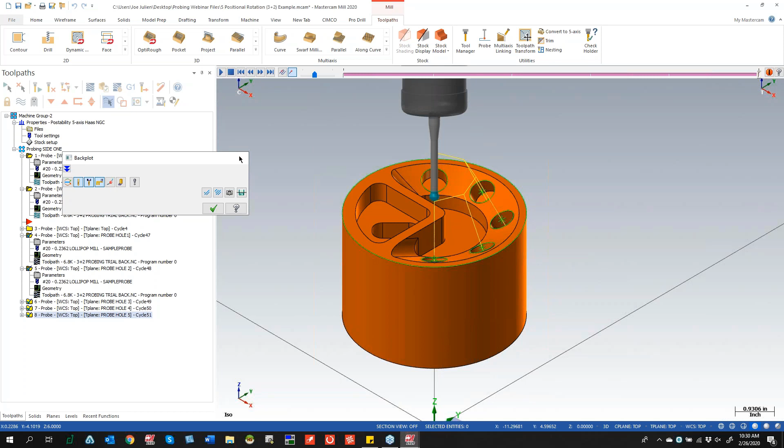So we can see we're probing to each one of these holes here, and the machine's making that rotation as we go. So super easy inside of Productivity Plus. Works the exact same way if you're doing anything positional in Mastercam as well. Okay, not much to it there.

We can hop into another one of our rotational examples here. So as Matt was talking about castings a little bit earlier, this would be a good candidate for a part like this here. So as we can see, if we go to a top view, we have a measurement from the center of this circle here and the center of this one. And we see that it's got a measurement of 4.4868 degrees.

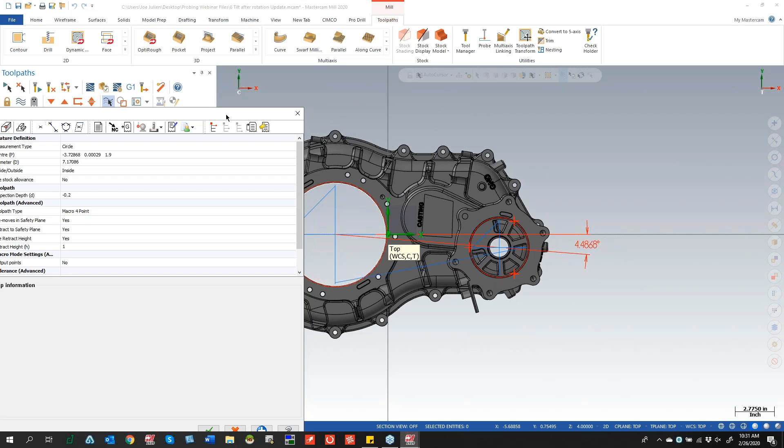If we go back into our Productivity Plus toolpath, we see that we're measuring out the circle here, circle here, and then our inspection cycle is a constructed line in between the 2 points that we selected here. And then outside of that, we're doing a rotation update based on that feature of the line that we created. So I'll go ahead and enact this here.

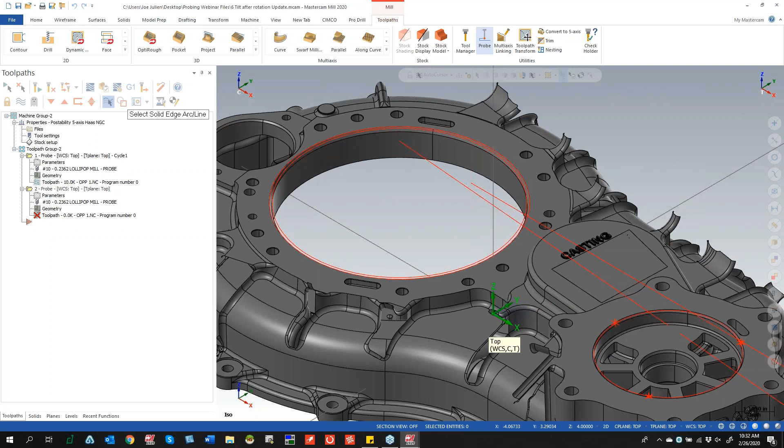Let's pull up a probing cycle. I'm going to probe a circle. Let me get into a better view here. I'm going to select my guy there, say OK. I'm going to go ahead and select a safety plane that's suitable for this specific cycle here.

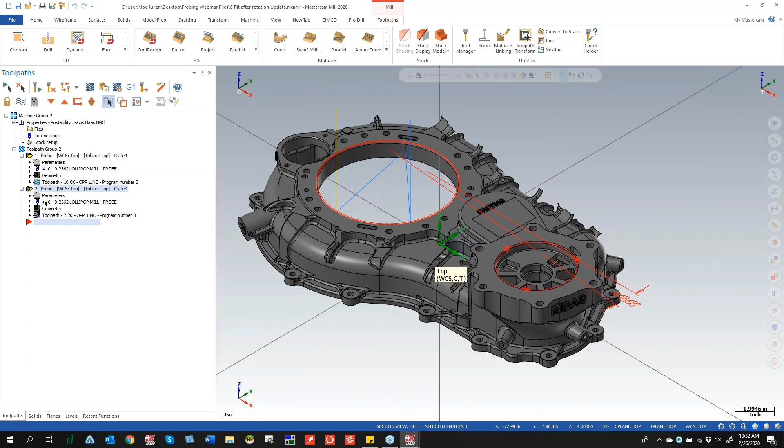So I'm going to keep going back into this process here, and then we can see how we can update this. So we're measuring that circle, going back into our parameters. We can go ahead and measure our circle here. Inspection depth, the same as what we've been looking at here. So we say OK, and now we've got 2 cycles measuring 2 diameters of those bores.

So now going back into our cycle here, we can actually select a constructed line. So when we pull open these dialog boxes here, we can actually drag these down. Oops, excuse me. Let me back out of that quick here. So we'll say a constructed line. We're referencing to the diameter of our circle here. So we wait until that little dialog box shows up when we drag it on top of this here. So we see that little arrow on top of here.

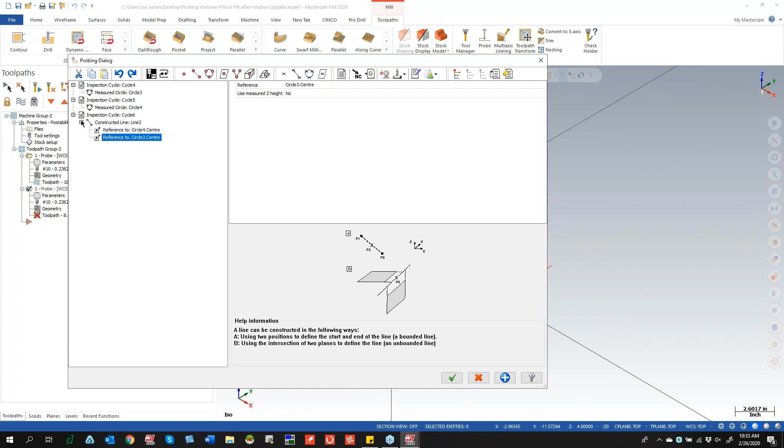So the 2 points that we're referencing here are going to be the centers of those circles. And we're not using a measured Z height for either of those. So we can go ahead and say OK, regenerate that, and now we can update that machine variable as well to display that. As we see in our original operation here, we're using a rotational update with our feature. We're rotating about Z, and then our G value here is going to be whatever we specify. So that's simulating what the control is going to be spitting out, that 4.4868 here.

And then we have a G code block inside of our probing dialog that's actually writing that angular value to update that variable. So whatever the current value it sees inside of there, it's going to be subtracting by the value that it measures, essentially. And then we're just doing our specific line here for our code. All right, so that's how you would do a rotational update inside of Productivity Plus, for something like a casting where you're not exactly sure what that angle is going to be when we're rotating.

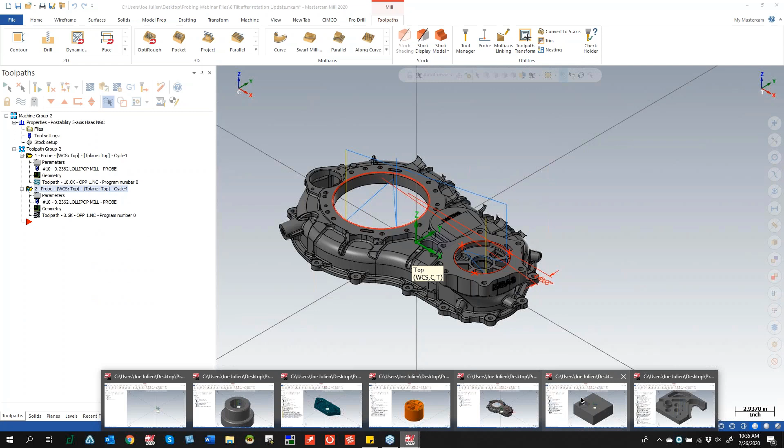Okay. So as we're going on here, I'm going to select this new example, and this is going to enact some of our if-then statements to quickly and intelligently remachine a part. So going through our list here, we have our first parameter, and this is what we call a label inside of Productivity Plus. A label is pretty much a benchmark inside of the software that we can choose to skip back to inside of the code and then remachine that product.

So as we can see, we've got a helix bore on this feature here, and after that helix bore, we have this probing cycle that's measuring the circle out. So if we go into our inspection cycle, typically what we've been seeing here is our measured circle. And then we have this new feature inside of here, and that's going to be our if-then statements. That's going to be on the right side of the menu here in Productivity Plus. So if we right click on our first option, the if statement, we can show that statement dialog.

And then it pops up this condition builder here. So if we measure a circle here, we can go ahead and select a certain feature off that circle. And then I know that that bore is supposed to be 1 inch directly here. So we can output the measured circle diameter, and if it's less than 1, then we can go ahead and create our logic statements after that here.

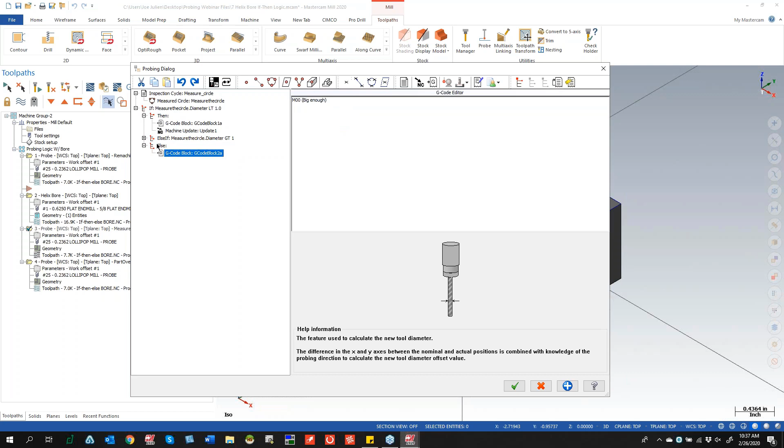So if it's less than 1, then we can display a message to our operator saying it's undersized. And then we can update the tool diameter on our machine as well here, off the feature that we selected here. So we have an if-else statement. So if it matches the less than, then it's going to go to our then statement. If it does not match our if-then statement, then we're going to our else, and that's just displaying to the operator that our size is big enough.

So if it doesn't meet either of those conditions, this is going to be when our condition is greater than 1 here, so that would mean it's oversized. Now we're going to that label that we selected here in the front of our file, and it's going to that oversized label there. So oversized here, if we go into our parameters, we have that label, and then we have a G-code block saying that our part's scrapped, and then we're ending out our program.

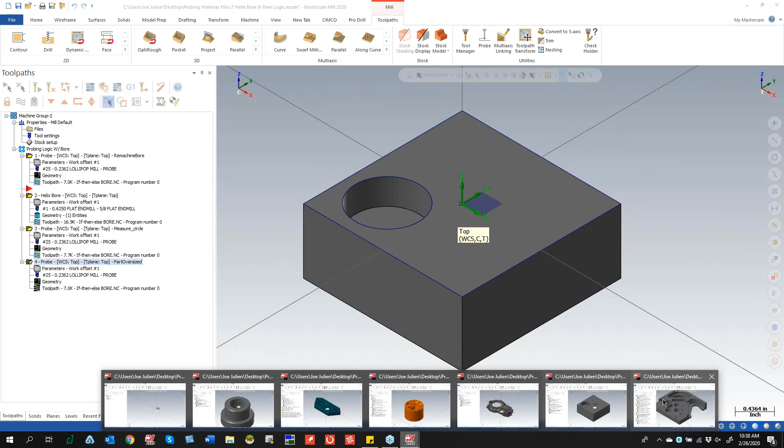So these can be intelligently built to remachine, to get your shop up to lights out, or just get more automated in your processes here. So that's kind of a quick, simple example here. I'm going to head back to one of the previous examples that we had to close up here, and that's going to be our comprehensive example that we showed before here.

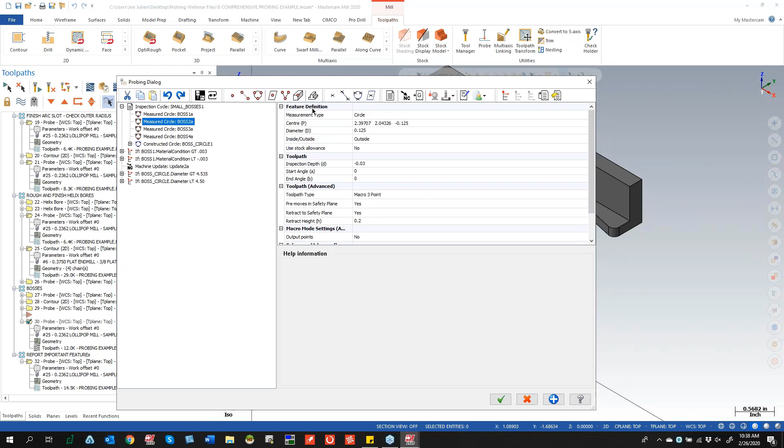So as we're going with this here, we can open up our cycle here. We have quite a few if-then statements here. So we're measuring the circle of our boss. So that's going to be all of our 4 pins here. And then like we did before, we're constructing that circle. So if that constructed circle's boss, the material condition, is greater than 3 thousandths, then we're updating the machine to update that tool diameter, which means that part's oversized. So it's going to go back to that label beforehand, label bosses here.

Outside of that, if it's less than, then we can update this as well here. Bosses have measured undersized, part is scrapped. And then we update to set that new boss diameter here as well. So if that boss circle is greater than 4.535, it looks like this is measuring another one of those here in terms of our boss circle there. So we've got a few G-code blocks out of that here as well. So that's typically how we work with the if-then statements inside of Productivity Plus. It's just fairly simple logic statements to enact a lot more efficiency in your processes here.

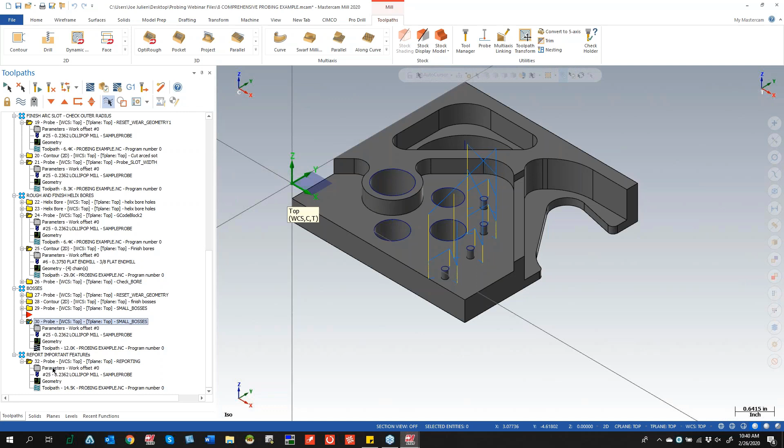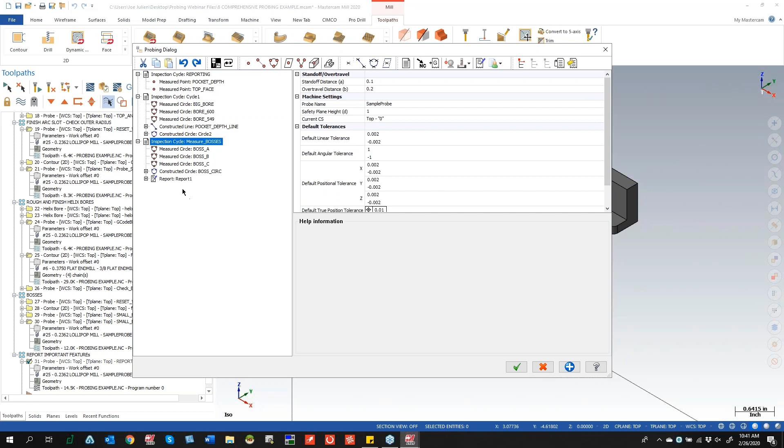So the last thing that I do want to cover is going to be the reporting features inside of Productivity Plus. So if we go into our last operation here, we have a reporting cycle. And depending on if that's reporting out through the DPRNT on the machine, or if we're directing all the way back to our programming station, we can actually measure out these points and then throw them back to a certain system through a report here. So we're measuring our pocket depth and our top face, inspection cycle 1. So we can report all of these kinds of things out here, and then reference out to this stuff here as well.

All right. Matt, do you have any other things that we want to go over? I feel like we just had a question from Robert Kemke there. Would you be able to set it up to run the routine every so many parts?

Yeah, definitely. So depending on what labels we select and things like that, we can actually add counters inside of the control. So if we write a value to a variable on the machine, every time that we reach that label, we can have that counter update by 1. And then we can have another if-then statement inside of our control that is effectively, once we get to 10, then we're going to be going to another label in the program, and then we're going to be finishing out there. So that's definitely doable there, Robert.